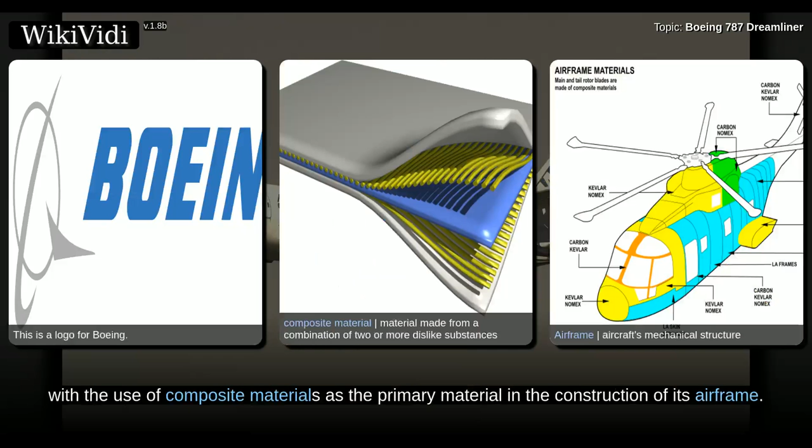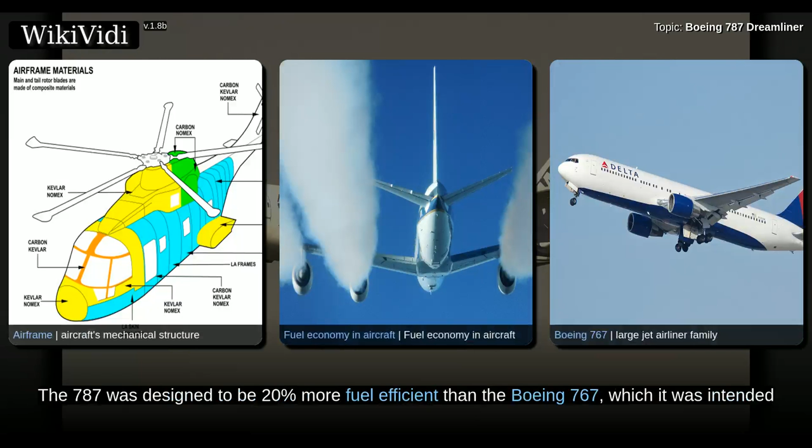It is a pioneering airliner, with the use of composite materials as the primary material in the construction of its airframe. The 787 was designed to be 20% more fuel efficient than the Boeing 767, which it was intended to replace. The 787 Dreamliner's distinguishing features include mostly electrical flight systems, raked wingtips, and noise-reducing chevrons on its engine nacelles.

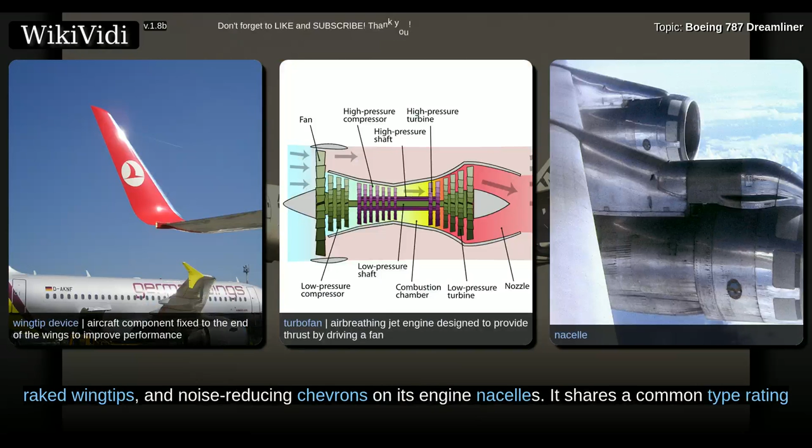It shares a common type rating with the larger Boeing 777 to allow qualified pilots to operate both models. The aircraft's initial designation was the 7E7, prior to its renaming in January 2005. The first 787 was unveiled in a rollout ceremony on July 8, 2007 at Boeing's Everett factory.

Development and production of the 787 has involved a large-scale collaboration with numerous suppliers worldwide. Final assembly takes place at the Boeing Everett factory in Everett, Washington, and at the Boeing South Carolina factory in North Charleston, South Carolina. Originally planned to enter service in May 2008, the project experienced multiple delays.

The airliner's maiden flight took place on December 15, 2009, and completed flight testing in mid-2011. Boeing has reportedly spent $32 billion on the 787 program. Final U.S. Federal Aviation Administration and European Aviation Safety Agency type certification was received in August 2011, and the first 787-8 was delivered in September 2011. It entered commercial service on October 26, 2011 with launch customer All Nippon Airways.

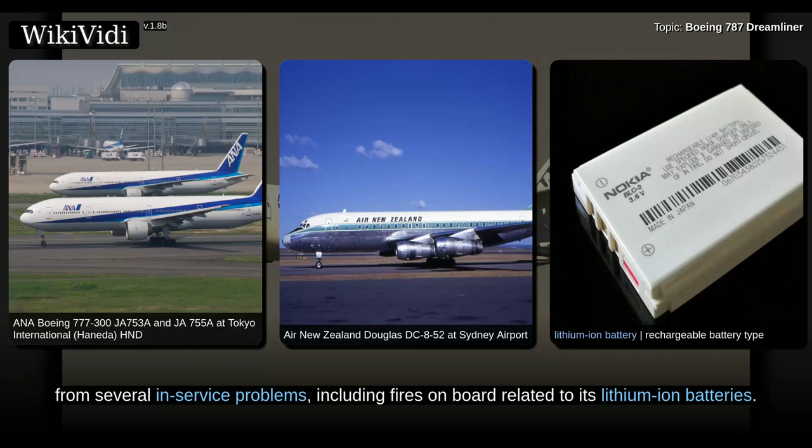The aircraft has suffered from several in-service problems, including fires on board related to its lithium-ion batteries. These systems were reviewed by both the FAA and the Japan Civil Aviation Bureau. The FAA issued a directive in January 2013 that grounded all 787s in the U.S., and other civil aviation authorities followed suit. After Boeing completed tests on a revised battery design, the FAA approved the revised design and lifted the grounding in April 2013. The 787 returned to passenger service later that month.

Background. During the late 1990s, Boeing considered replacement aircraft programs as sales of the 767 and 747-400 slowed. Two new aircraft were proposed, the 747X, which would have lengthened the 747-400 and improved efficiency, and the Sonic Cruiser, which would have achieved 15% higher speeds while burning fuel at the same rate as the 767.

Market interest for the 747X was tepid, however several major American airlines, including Continental Airlines, showed initial enthusiasm for the Sonic Cruiser, although concerns about the operating cost were also expressed. The global airline market was disrupted by the September 11, 2001 attacks and increased petroleum prices, making airlines more interested in efficiency than speed. The worst affected airlines, those in the United States, had been considered the most likely customers of the Sonic Cruiser. Thus the Sonic Cruiser was officially cancelled on December 20, 2002.

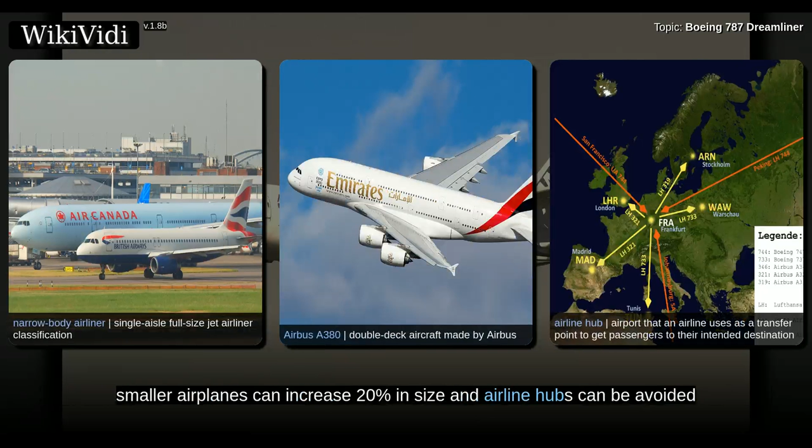For Boeing Commercial Airplanes VP Marketing Randy Baseler, airport congestion comes from large numbers of regional jets and small single aisles, flying to destinations where a 550-seat A380 would be too large. To reduce the number of departures, smaller airplanes can increase 20% in size and airline hubs can be avoided with point-to-point transit.

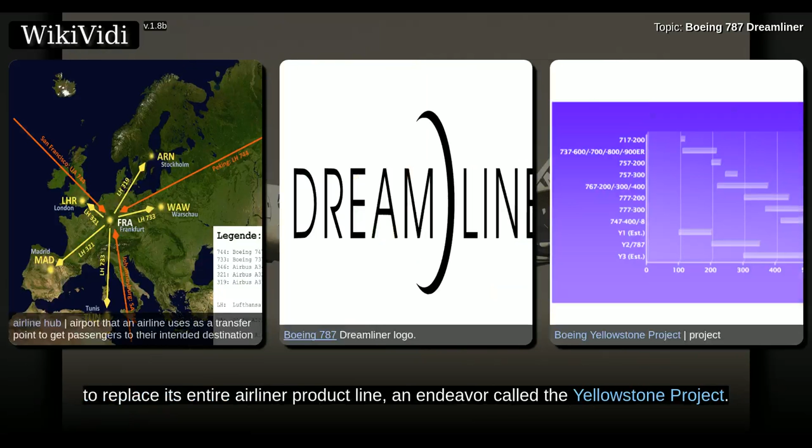The replacement for the Sonic Cruiser project was named 7E7. Technology from the Sonic Cruiser and 7E7 was to be used as part of Boeing's project to replace its entire airliner product line, an endeavor called the Yellowstone Project. Early concept images of the 787 included rakish cockpit windows, a dropped nose and a distinctive shark fin tail.

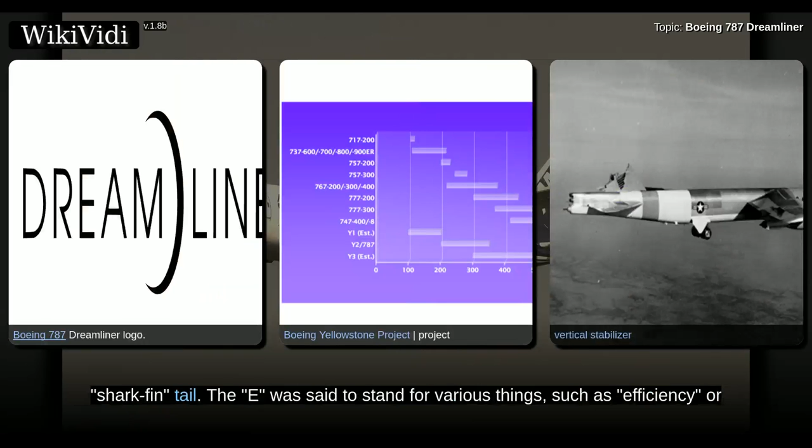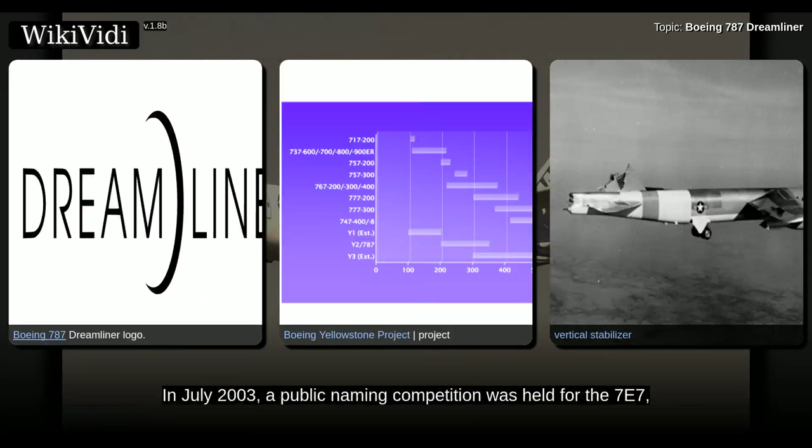The E was said to stand for various things, such as efficiency or environmentally friendly. However, in the end, Boeing said that it merely stood for 8. In July 2003, a public naming competition was held for the 7E7, for which out of 500,000 votes cast online the winning title was Dreamliner. Other names included eLiner, Global Cruiser, and Stratoclimber.

On April 26, 2004, Japanese airline All Nippon Airways became the launch customer for the 787, announcing a firm order for 50 aircraft with deliveries to begin in late 2008. The ANA order was initially specified as 30 787-3, 290–330-seat, one-class domestic aircraft, and 20 787-8, long-haul, 210–250-seat, two-class aircraft for regional international routes such as Tokyo Narita–Beijing, and could perform routes to cities not previously served, such as Denver, Moscow, and New Delhi.

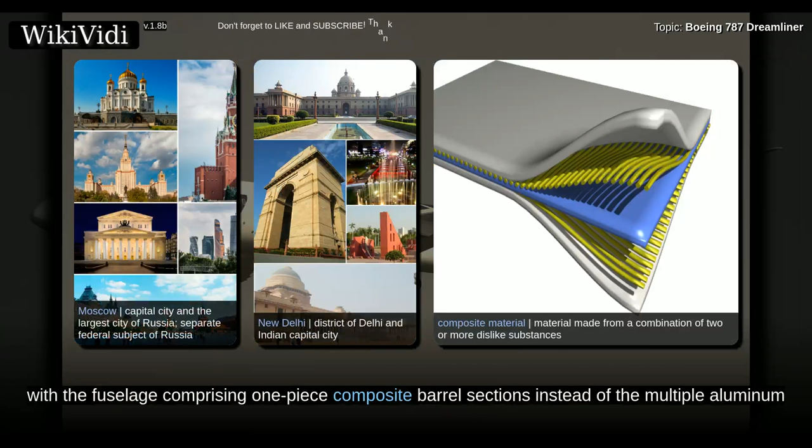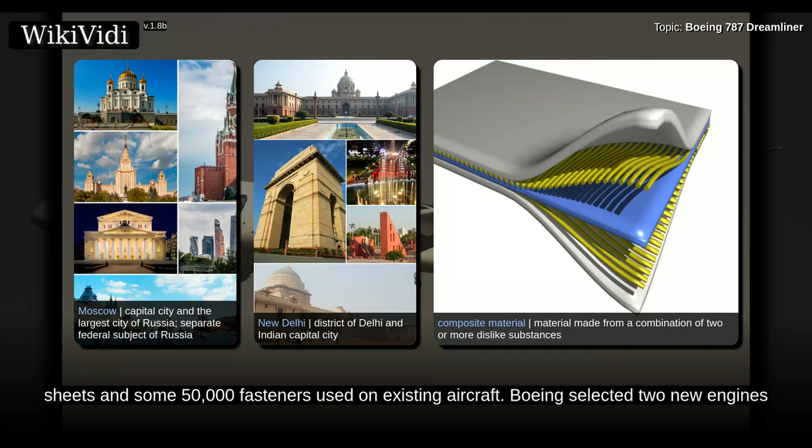The 787-3 and 787-8 were to be the initial variants, with the 787-9 entering service in 2010. The 787 was designed to be the first production airliner with the fuselage comprising one-piece composite barrel sections instead of the multiple aluminum sheets and some 50,000 fasteners used on existing aircraft. Boeing selected two new engines to power the 787, the Rolls-Royce Trent 1000 and General Electric GEnx. Boeing stated the 787 would be approximately 20% more fuel efficient than the 767, with approximately 40% of the efficiency gain from the engines, plus gains from aerodynamic improvements, increased use of lighter-weight composite materials, and advanced systems.

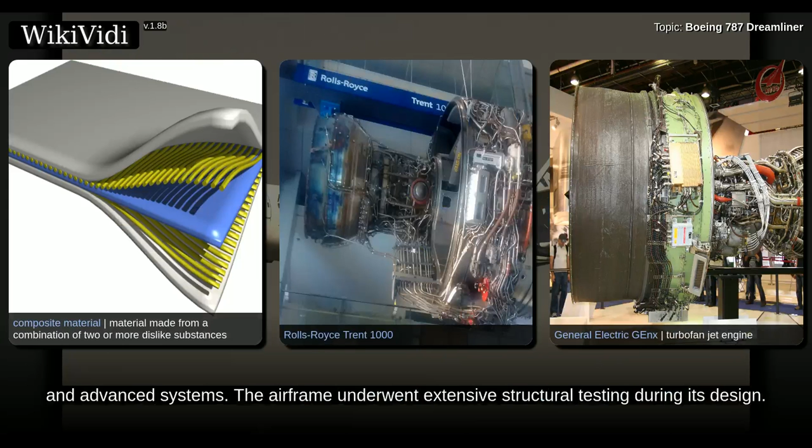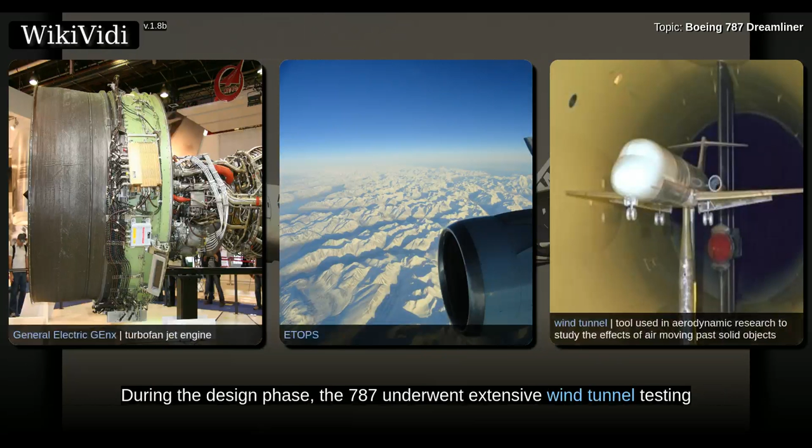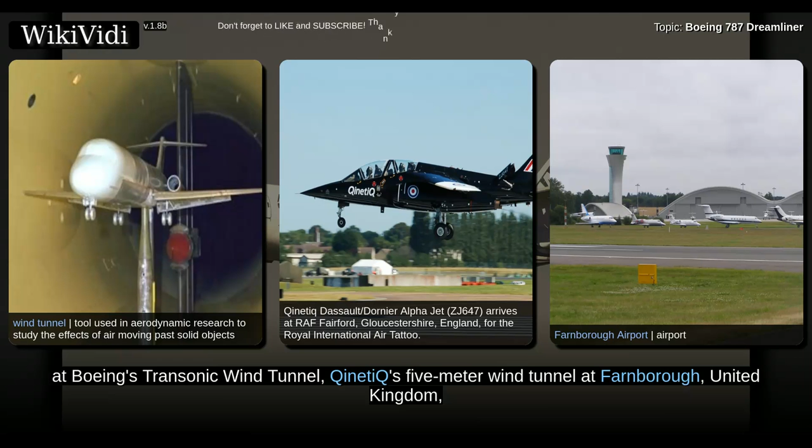The airframe underwent extensive structural testing during its design. The 787-8 and -9 were intended to have a certified 330-minute ETOPS capability. During the design phase, the 787 underwent extensive wind tunnel testing at Boeing's transonic wind tunnel, QinetiQ's 5-meter wind tunnel at Farnborough, United Kingdom, and NASA Ames Research Center's wind tunnel, as well as at the French aerospace research agency, ONERA. The final styling was more conservative than earlier proposals, with the fin, nose, and cockpit windows changed to a more conventional form. By 2005, customer announced orders and commitments for the 787 reached 237 aircraft.

Boeing initially priced the 787-8 variant at $120 million, a low figure that surprised the industry. In 2007, the list price was $146–151.5 million for the 787-3, $157–167 million for the 787-8, and $189–200 million for the 787-9.

Manufacturing and suppliers. On December 16, 2003, Boeing announced that the 787 would be assembled in its factory in Everett, Washington. Instead of conventionally building the aircraft from the ground up, final assembly employed 800 to 1,200 people to join completed sub-assemblies and to integrate systems. Boeing assigned global subcontractors to do more assembly work, delivering completed sub-assemblies to Boeing for final assembly. This approach was intended to result in a leaner, simpler assembly line and lower inventory, with pre-installed systems reducing final assembly time by three-quarters to three days.

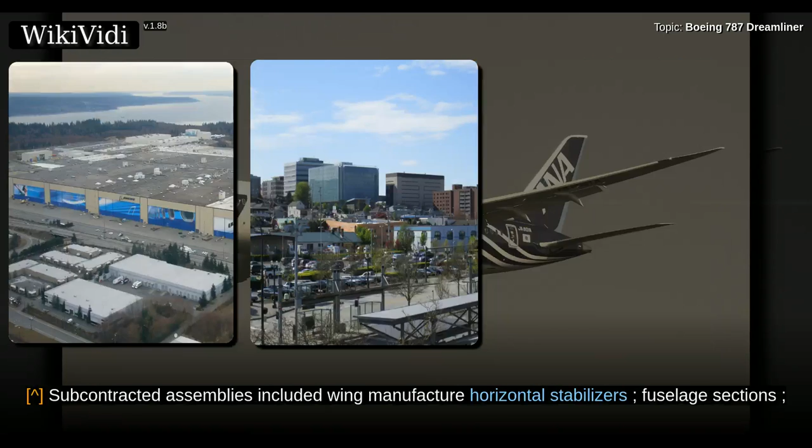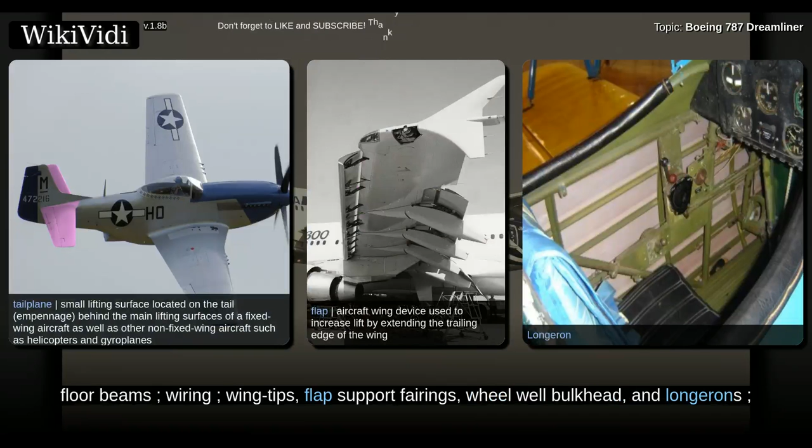Subcontracted assemblies included wing manufacture, horizontal stabilizers, fuselage sections, passenger doors, cargo doors, access doors, and crew escape door, software development, floor beams, wiring, wingtips, flap support fairings, wheel well bulkhead, and longerons, landing gear, and power distribution and management systems, air conditioning packs. To speed up deliveries, Boeing modified four used 747-400s into 747 Dreamlifters to transport 787 wings, fuselage sections, and other smaller parts.

Japanese industrial participation was key on the project. Japanese companies co-designed and built 35% of the aircraft, the first time that outside firms played a key design role on Boeing airliner wings. The Japanese government supported development with an estimated $2 billion in loans. On April 26, 2006, Japanese manufacturer Toray Industries and Boeing signed a production agreement involving $6 billion worth of carbon fiber, extending a 2004 contract.

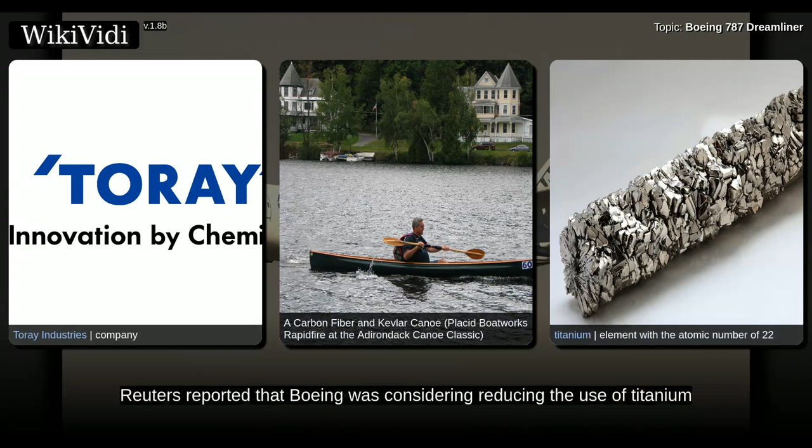In May 2007, final assembly on the first 787 began at Everett. Boeing worked to trim excess weight since assembly of the first airframe began in late 2006. The first six 787s were stated to be overweight, with the first aircraft being heavier than specified. The seventh and subsequent aircraft would be the first optimized 787-8s expected to meet all goals. Accordingly, some parts were redesigned to include more use of titanium. Early-built 787s were overweight and some carriers decided to take the later aircraft. In early 2015, Boeing was trying to sell 10 such aircraft. In July 2015, Reuters reported that Boeing was considering reducing the use of titanium to reduce construction costs.

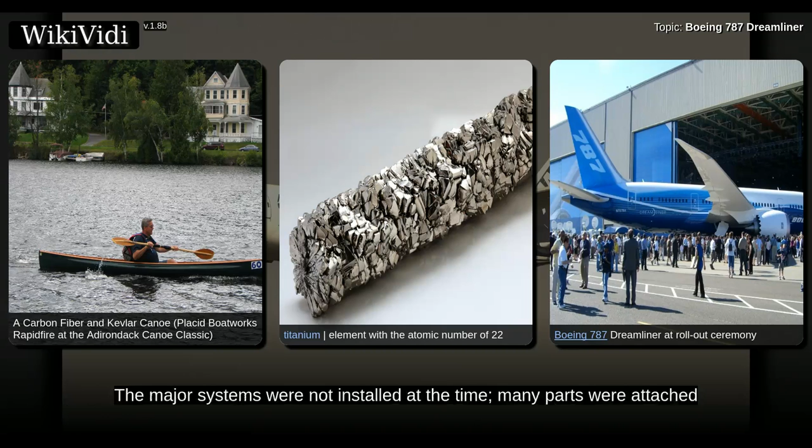Boeing intended for a first flight by the end of August 2007, and premiered the first 787 at a rollout ceremony on July 8, 2007. The 787 had 677 orders at this time, which is more orders from launch to rollout than any previous wide-body airliner. The major systems were not installed at the time. Many parts were attached with temporary non-aerospace fasteners requiring replacement with flight fasteners later. In September 2007, Boeing announced a three-month delay, blaming a shortage of fasteners as well as incomplete software.

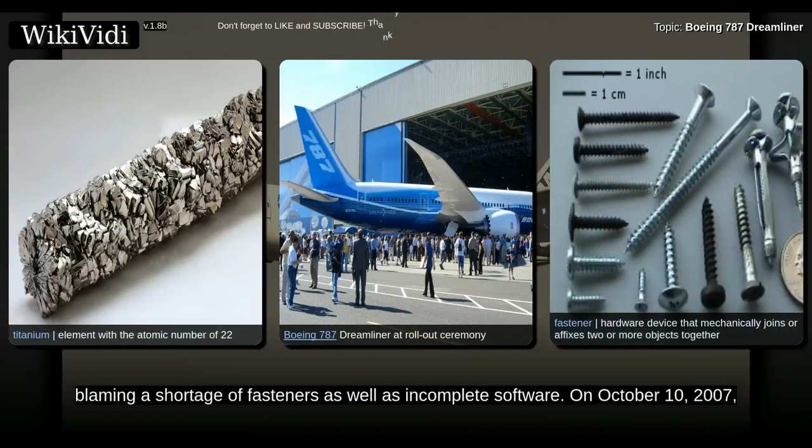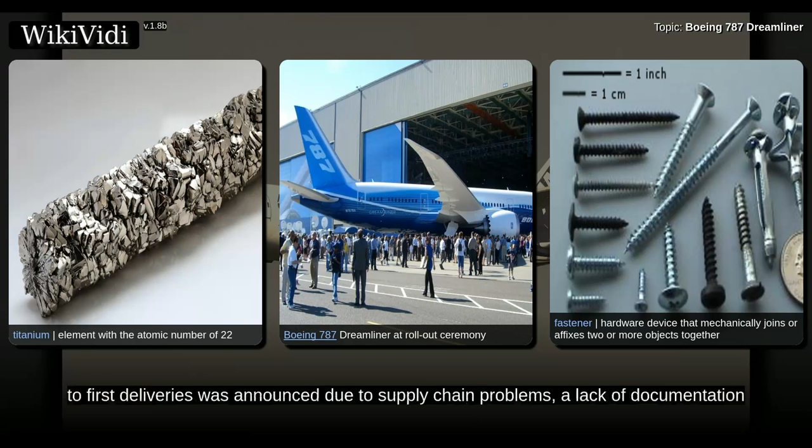On October 10, 2007, a second 3-month delay to the first flight and a 6-month delay to first deliveries was announced due to supply chain problems, a lack of documentation from overseas suppliers, and flight guidance software delays. Less than a week later, Mike Bair, the 787 program manager, was replaced.

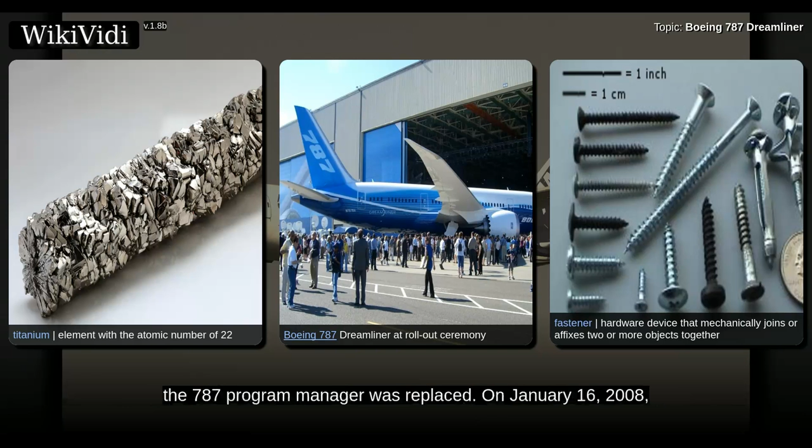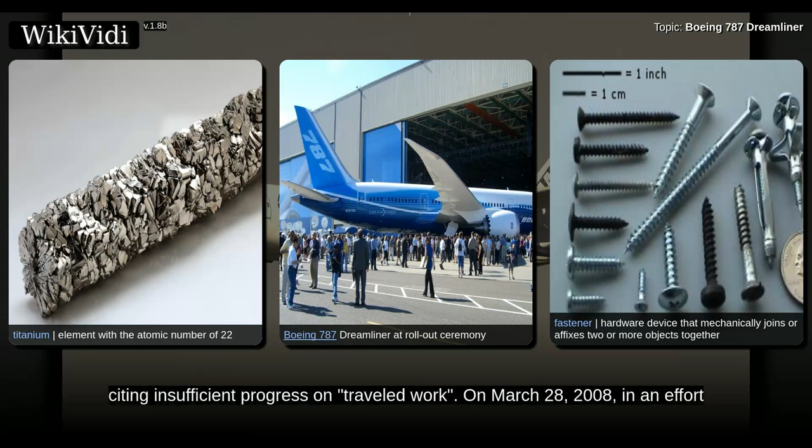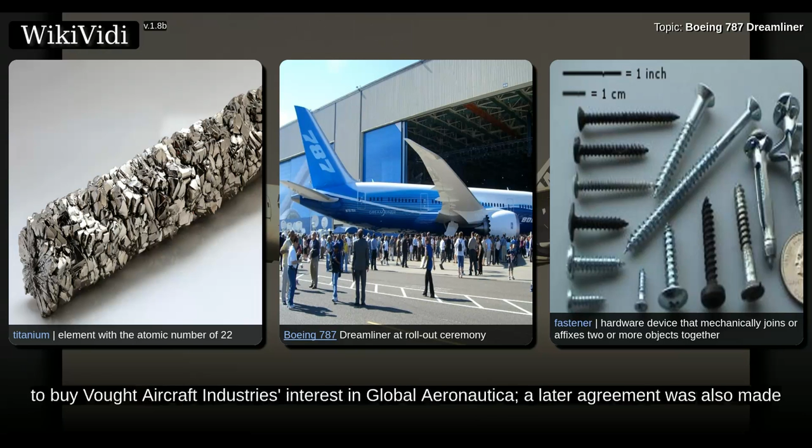On January 16, 2008, Boeing announced a third 3-month delay to the first flight of the 787, citing insufficient progress on traveled work. On March 28, 2008, in an effort to gain more control over the supply chain, Boeing announced plans to buy Vought Aircraft Industries' interest in Global Aeronautica. A later agreement was also made to buy Vought's factory in North Charleston.

On April 9, 2008, a fourth delay was announced, shifting the maiden flight to the fourth quarter of 2008, and delaying initial deliveries by around 15 months to the third quarter of 2009. The 787-9 variant was postponed to 2012, and the 787-3 variant was to follow at a later date.

On November 4, 2008, a fifth delay was announced due to incorrect fastener installation and the Boeing machinists' strike, stating that the first test flight would not occur in the fourth quarter of 2008. After assessing the program schedule with suppliers, in December 2008, Boeing stated that the first flight was delayed until the second quarter of 2009. Airlines such as United Airlines and Air India stated their intentions to seek compensation from Boeing for the delays.

Pre-flight ground testing. As Boeing worked with its suppliers towards production, the design proceeded through a series of test goals. On August 23, 2007, a crash test involving a vertical drop of a partial composite fuselage section onto a thick steel plate occurred in Mesa, Arizona. The results matched predictions, allowing modeling of various crash scenarios using computational analysis instead of further physical tests.

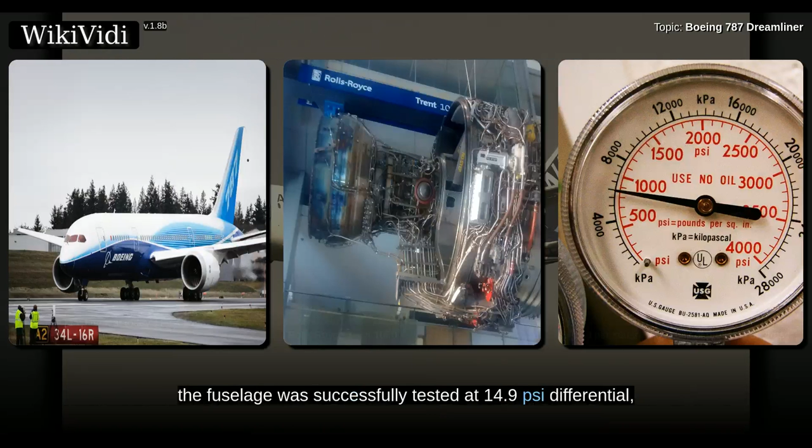On August 7, 2007, on-time certification of the Rolls-Royce Trent 1000 engine by European and U.S. regulators was received. The alternative GE GEnx-1B engine achieved certification on March 31, 2008. On June 20, 2008, the first aircraft was powered up, for testing the electrical supply and distribution systems. A non-flight-worthy static test airframe was built on September 27, 2008. The fuselage was successfully tested at 14.9 psi differential, which is 150% of the maximum pressure expected in commercial service. In December 2008, the 787's maintenance program was passed by the FAA.

On May 3, 2009, the first test 787 was moved to the flight line following extensive factory testing, including landing gear swings, systems integration verification, and a total run-through of the first flight. On May 4, 2009, a press report indicated a 10–15% range reduction, instead of the originally promised 7,700 to 8,200 nmi, for early aircraft that were about 8% overweight. Substantial redesign work was expected to correct this, which would complicate increases in production rates.

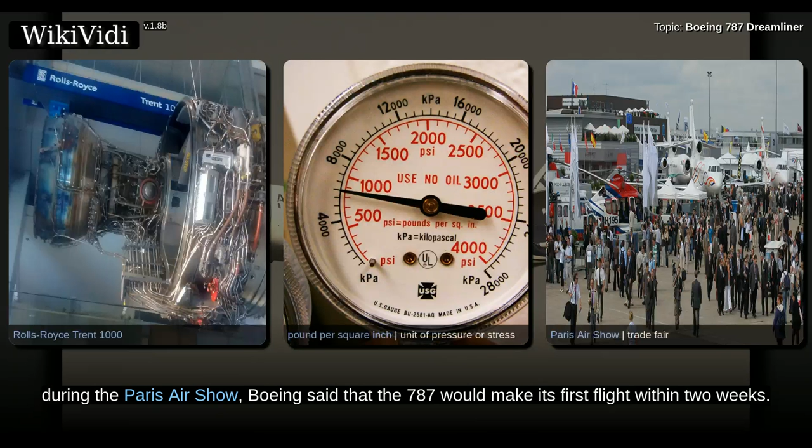On June 15, 2009, during the Paris Air Show, Boeing said that the 787 would make its first flight within 2 weeks. However, on June 23, 2009, the first flight was postponed due to structural reasons. Boeing provided an updated 787 schedule on August 27, 2009, with the first flight planned to occur by the end of 2009 and deliveries to begin at the end of 2010.

The company expected to write off $2.5 billion because it considered the first 3 Dreamliners built unsellable and suitable only for flight tests. On October 28, 2009, Boeing selected Charleston, South Carolina as the site for a second 787 production line after soliciting bids from multiple states. On December 12, 2009, the first 787 completed high-speed taxi tests, the last major step before flight.

Flight Test Program.

On December 15, 2009, Boeing conducted the 787-8 maiden flight from Paine Field in Everett, Washington, at 10:27 a.m. PST and landed 3 hours later at 1:33 p.m. at Seattle's Boeing Field. Originally scheduled for 5.5 hours, the test flight was shortened to 3 hours, with the pilots wanting to complete the flight under visual meteorological conditions while visibility and cloud ceiling were low.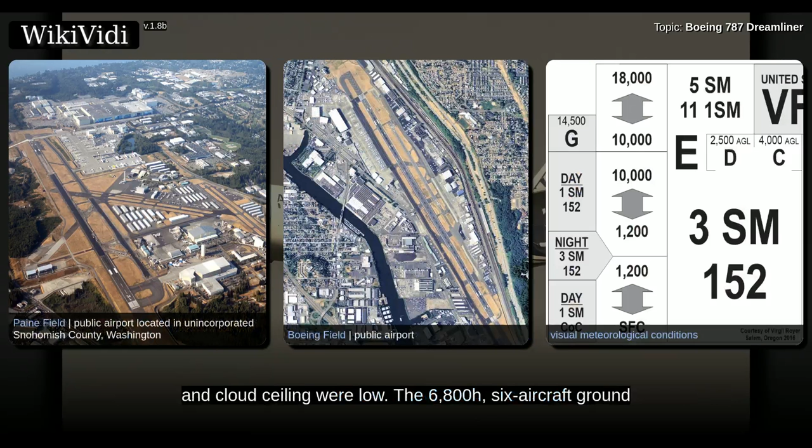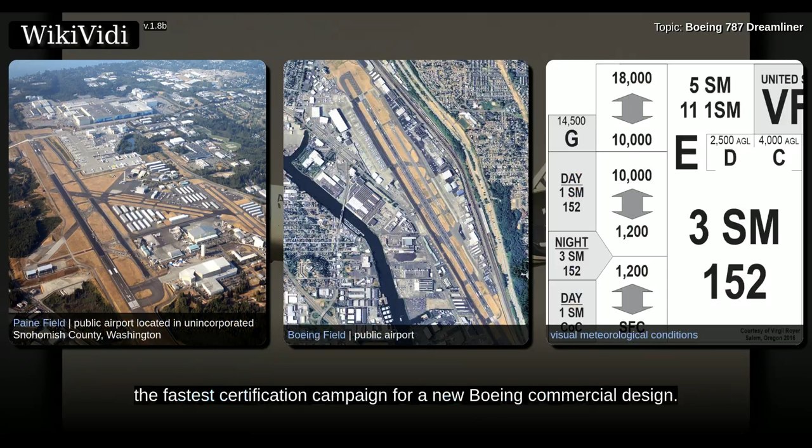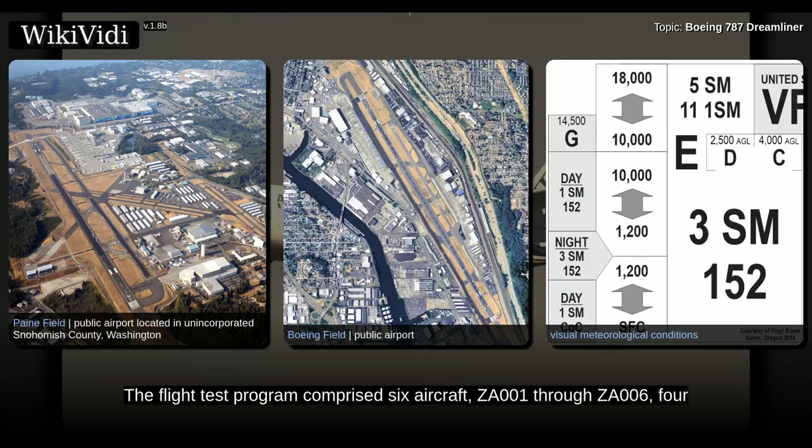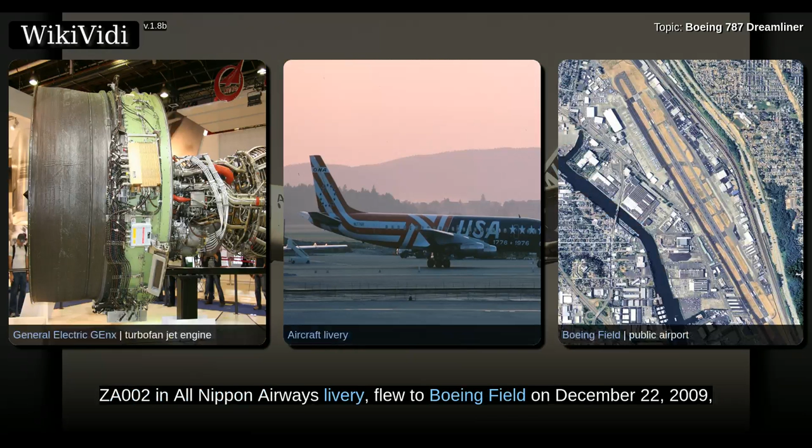The six-aircraft ground and flight test program was scheduled in 8.5 months, the fastest certification campaign for a new Boeing commercial design. The flight test program comprised 6 aircraft, ZA001 through ZA006, 4 with Rolls-Royce Trent 1000 engines and 2 with GE GEnx-1B64 engines. The second 787, ZA002 in All Nippon Airways livery, flew to Boeing Field on December 22, 2009.

To join the flight test program, the third 787, ZA004, made its first flight on February 24, 2010, followed by ZA003 on March 14, 2010. On March 24, 2010, flutter and ground effects testing was completed, clearing the aircraft to fly its entire flight envelope. On March 28, 2010, the 787 completed the ultimate wing load test,

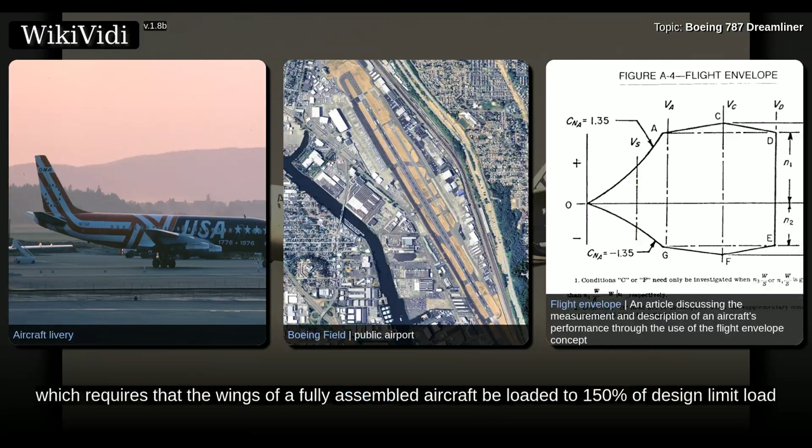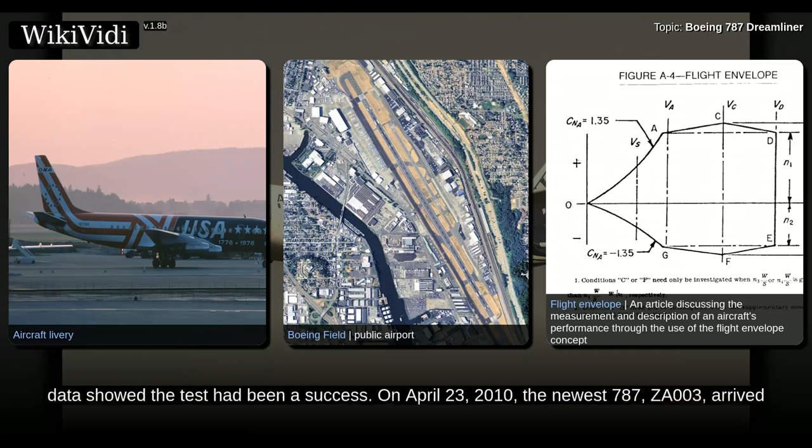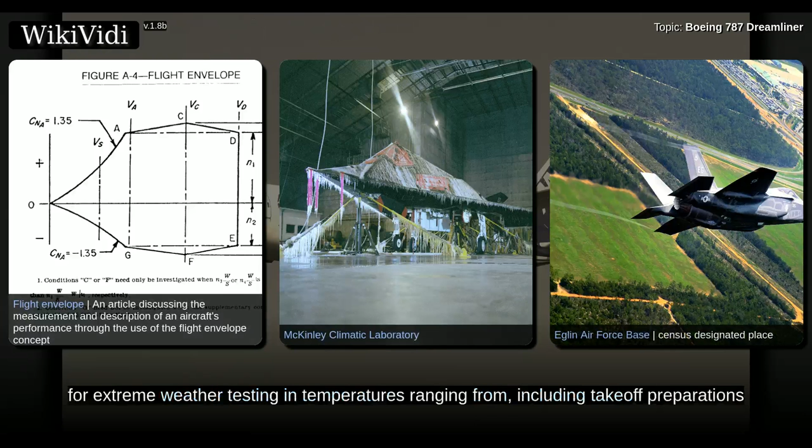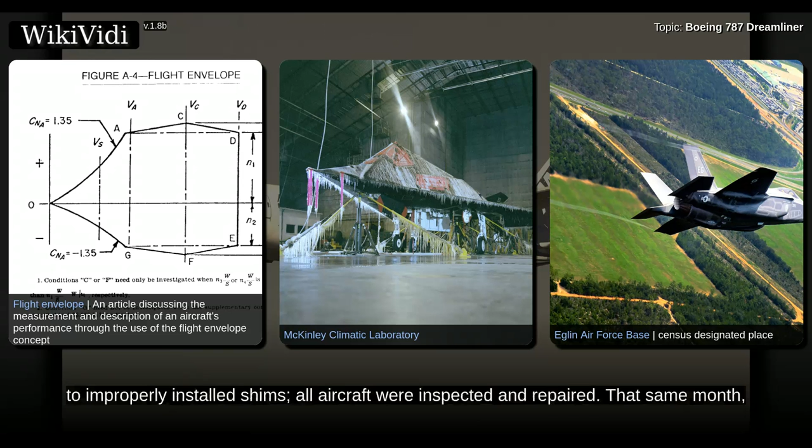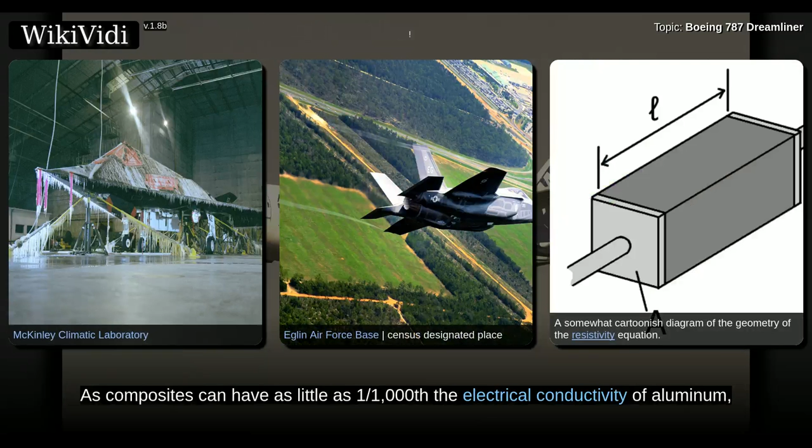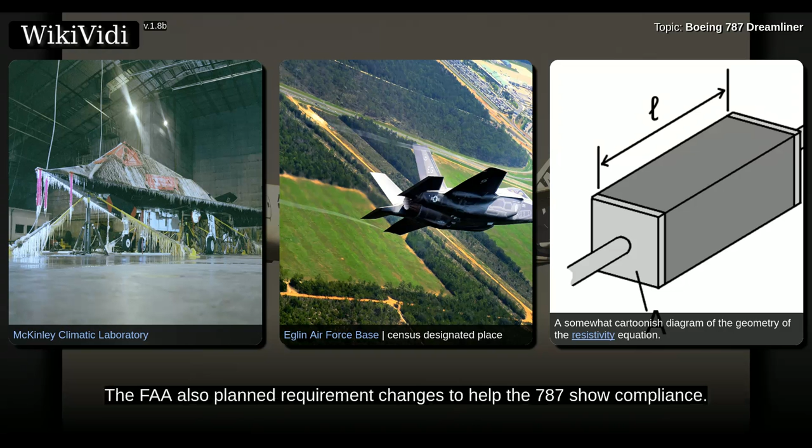In June 2010, gaps were discovered in the horizontal stabilizers of test aircraft due to improperly installed shims. All aircraft were inspected and repaired. That same month, a 787 experienced its first in-flight lightning strike. Inspections found no damage, as composites can have as little as 1/1000th the electrical conductivity of aluminum. Conductive material is added to ameliorate potential risks and to meet FAA requirements. The FAA also planned requirement changes to help the 787 show compliance.

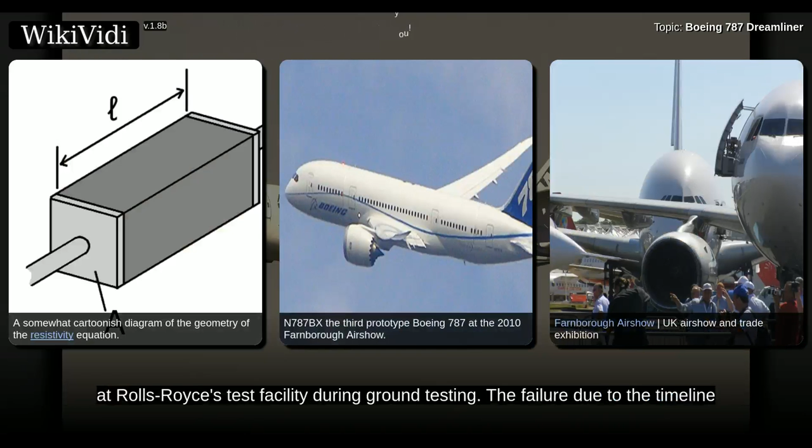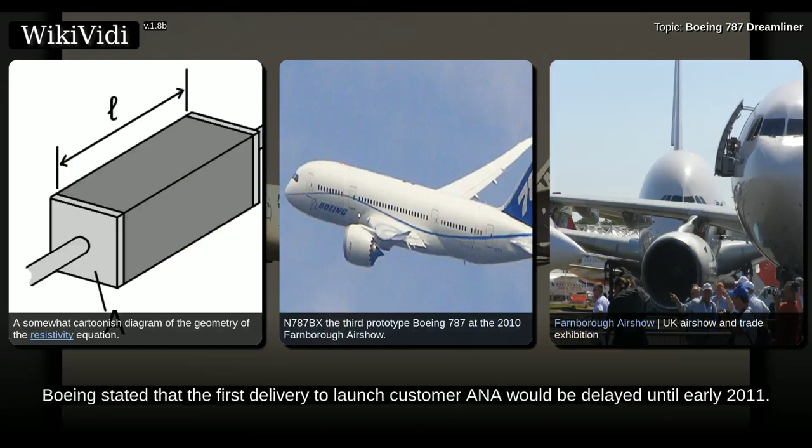The 787 made its first appearance at an international airshow at the Farnborough Airshow, United Kingdom, on July 18, 2010. On August 2, 2010, a Trent 1000 engine suffered a blowout at Rolls-Royce's test facility during ground testing. The failure led to the timeline for installing Trent 1000 engines being re-evaluated. On August 27, 2010, Boeing stated that the first delivery to launch customer ANA would be delayed until early 2011. That same month, Boeing faced compensation claims from airlines owing to ongoing delivery delays.

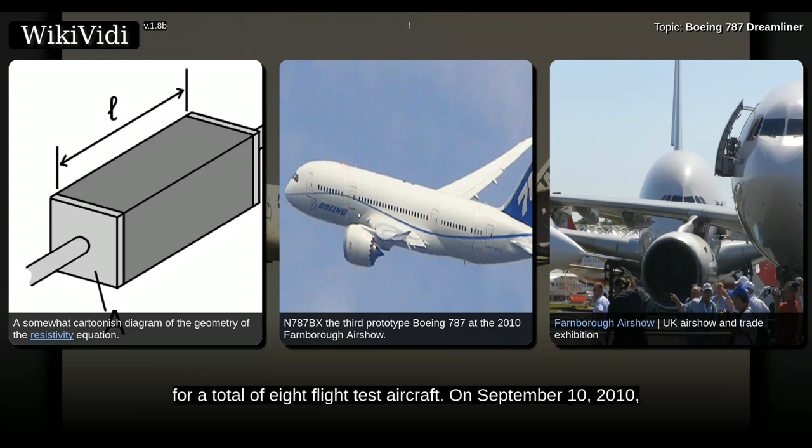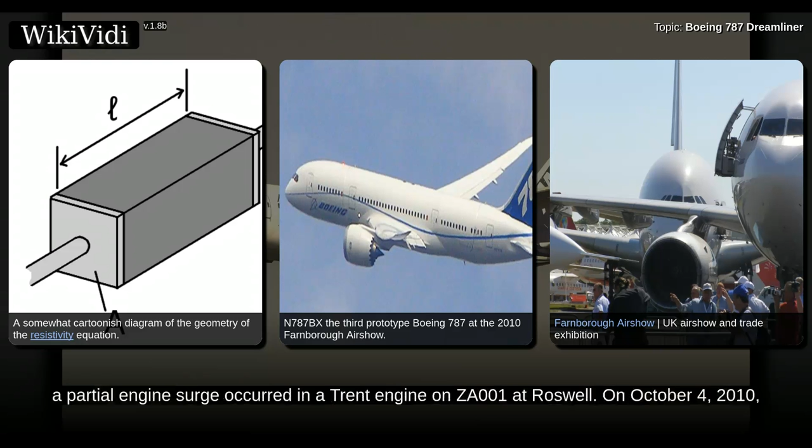In September 2010, it was reported that a further 2 787s might join the test fleet, for a total of 8 flight test aircraft. On September 10, 2010, a partial engine surge occurred in a Trent engine on ZA001 at Roswell. On October 4, 2010, the 6th 787, ZA006, joined the test program with its first flight. On November 9, 2010, Boeing 787 ZA002 made an emergency landing at Laredo International Airport, Texas, after smoke and flames were detected in the main cabin during a test flight. The electrical fire caused some systems to fail before landing.

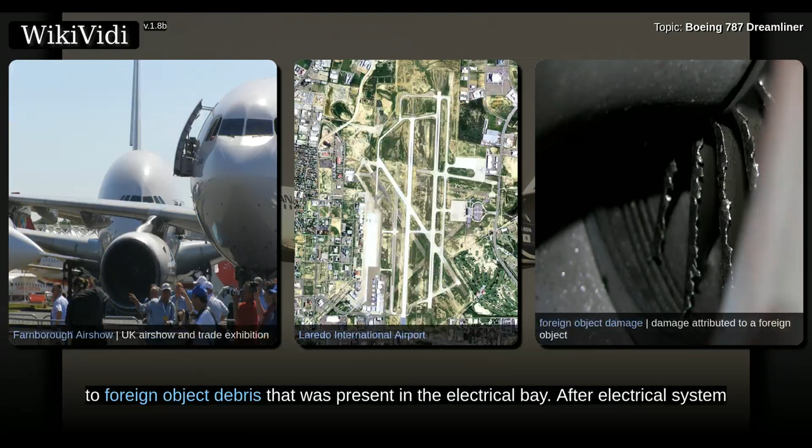Following this incident, Boeing suspended flight testing on November 10, 2010. Ground testing continued. After investigation, the in-flight fire was primarily attributed to foreign object debris that was present in the electrical bay. After electrical system and software changes, the 787 resumed flight testing on December 23, 2010. On November 5, 2010, it was reported that some 787 deliveries would be delayed to address problems found during flight testing. In January 2011, the first 787 delivery was rescheduled to the third quarter of 2011 due to software and electrical updates following the in-flight fire.

By February 24, 2011, the 787 had completed 80% of the test conditions for the Rolls-Royce Trent 1000 engine and 60% of the conditions for the General Electric GEnx-1B engine. In July 2011, ANA performed a week of operations testing using a 787 in Japan. The test aircraft had flown 4,828 hours in 1,707 flights combined by August 15, 2011. During testing, the 787 visited 14 countries in Asia, Europe, North America, and South America to test in extreme climates and conditions and for route testing.

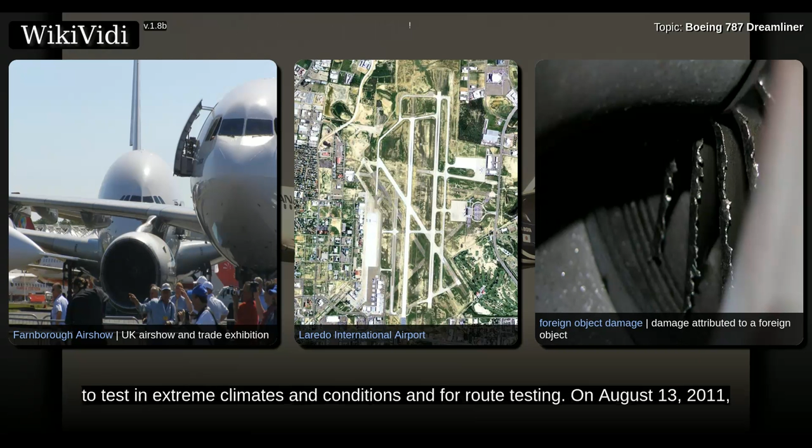On August 13, 2011, certification testing of the Rolls-Royce-powered 787-8 finished. The FAA and European Aviation Safety Agency certified the 787 on August 26, 2011, at a ceremony in Everett, Washington. Certification had taken 18 months, twice as long as originally planned. The newer stretched version, the 787-9, had flown 141 hours as of November 8, 2013. Service entry and early operations.

Certification cleared the way for deliveries. In 2011, Boeing prepared to increase 787 production rates from 2 to 10 aircraft per month at assembly lines in Everett and Charleston over 2 years.

Legal difficulties clouded production at Charleston. On April 20, 2011, the National Labor Relations Board alleged that a second production line in South Carolina violated 2 sections of the National Labor Relations Act. In December 2011, the National Labor Relations Board dropped its lawsuit after the Machinists' Union withdrew its complaint as part of a new contract with Boeing. The first 787 assembled at South Carolina was rolled out on April 27, 2012.

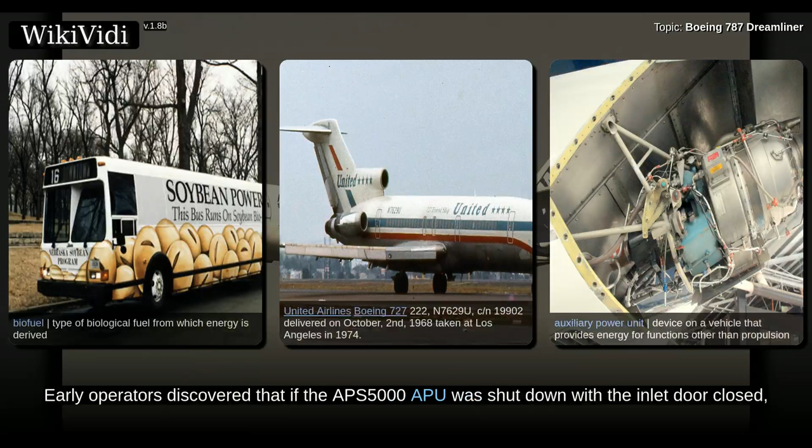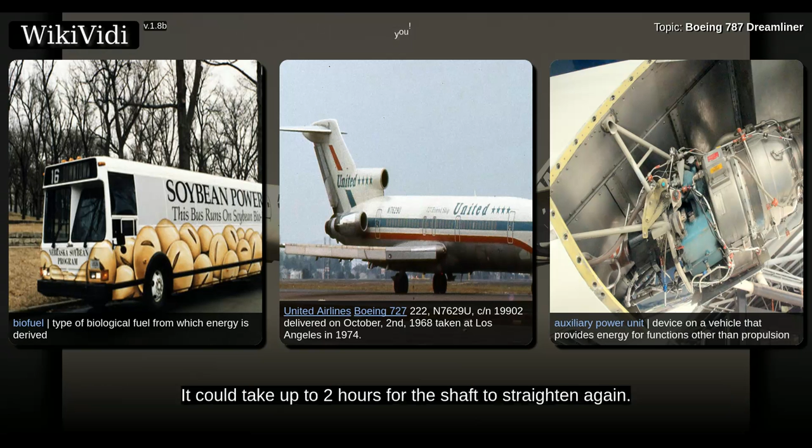Early operators discovered that if the APS5000 APU was shut down with the inlet door closed, heat continued to build up in the tail compartment and cause the rotor shaft to bow. It could take up to 2 hours for the shaft to straighten again. This was particularly acute on short-haul flights as there was insufficient time to allow the unit to cool before a restart was needed. Procedures were modified and the APU was later redesigned to address the issue.

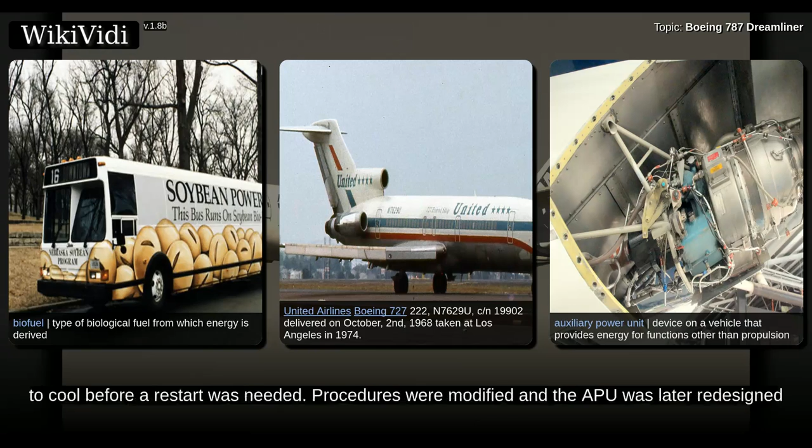On September 15, 2012, the NTSB requested the grounding of certain 787s due to GE engine failures. GE believed the production problem had been fixed by that time.

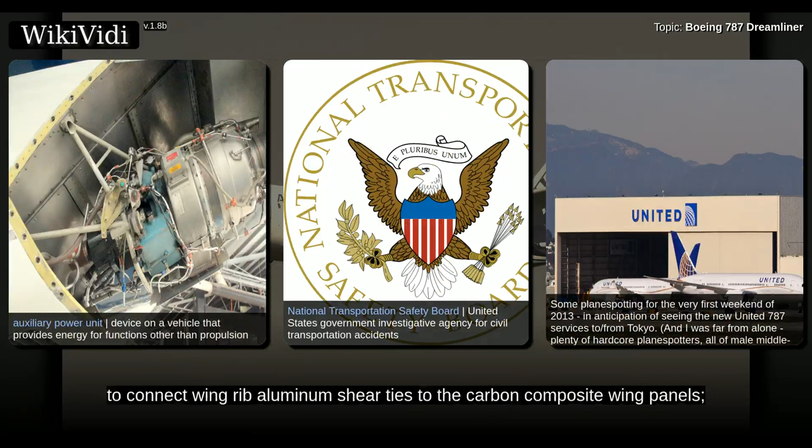In March 2014, Mitsubishi Heavy Industries informed Boeing of a new problem that was caused by a change in manufacturing processes. Employees did not fill gaps with shims to connect wing rib aluminum shear ties to the carbon composite wing panels. The tightened fasteners, without shims, cause excessive stress that creates hairline cracks in the wings, which could enlarge and cause further damage. 42 aircraft awaiting delivery were affected, and each one required 1–2 weeks to inspect and repair. However, Boeing did not expect this problem to affect the overall delivery schedule, even if some airplanes were delivered late.

Dispatch reliability is an industry-standard measure of the rate of departure from the gate, with no more than 15 minutes delay due to technical issues. The 787-8 started out with approximately 96% operational reliability, increasing to approximately 98.5% in April 2015. Daily utilization increased from 5 hours in 2013 to 12 hours in 2014. Dispatch reliability grew to 99.3% in 2017.

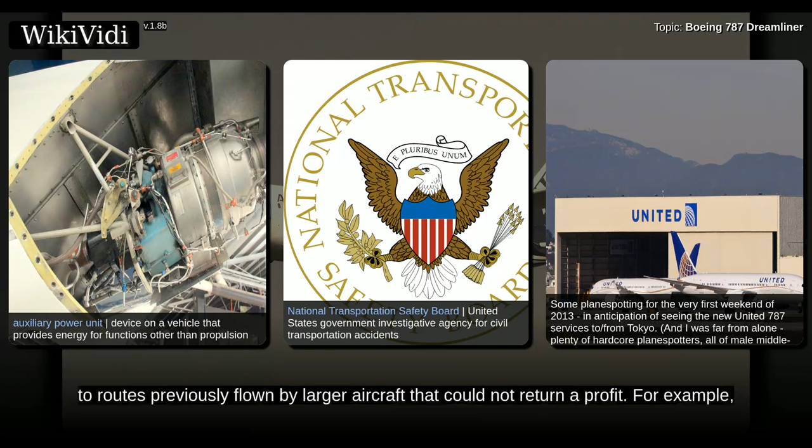Airlines have often assigned the 787 to routes previously flown by larger aircraft that could not return a profit. For example, Air Canada offered a Toronto to New Delhi route, first utilizing a Lockheed L1011, then a Boeing 747, then an Airbus A340, but none of these types were efficient enough to generate profit. The airline operated the route profitably with a 787-9, and credits the right number of seats and greater fuel efficiency for this success.